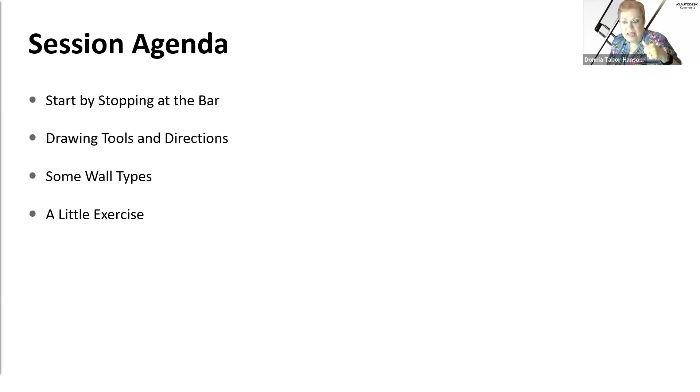We're going to cover everything across the bar. Some things you may not have touched on before, some you might have. I'm hoping that there's going to be one thing today that's just like, wow, never thought of that. But a lot of these things are things we've been using for years. So just bear with me on the tedious stuff. We're going to get some juicy little nuggets in there somewhere. We're going to look at the drawing tools and directions and how they affect the walls. We're going to look at some wall types and then a lot of little exercise stuff. So let's dive into stopping at the bar.

And we want to start with the options bar. When you start any command in Revit, you're in the ribbon area. Take a look at the bar before you go down into your drawing area, because it's very important what all is on there. There's always nuggets of information of things that you can do. So this is the options bar for drawing a wall. You can set your height and depth option, which determines if the wall will be drawn from the level up or the level down. If you've never done that, we're going to do that today. We're going to draw it down.

The benefit of drawing down: you can draw a foundation wall without having a foundation level. You don't have to have a level down there. You can just draw down.

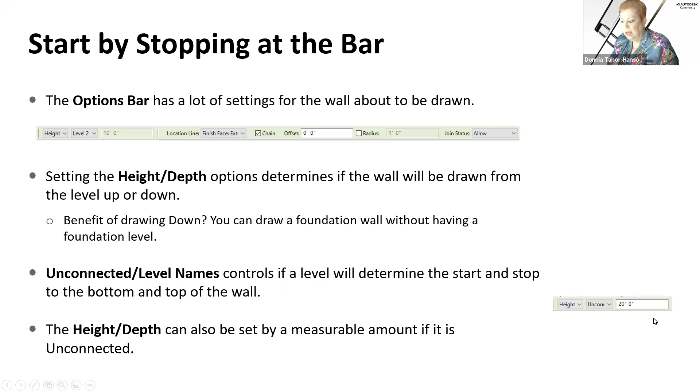And unconnected, if you go between the level name and unconnected: when it's at the level, you don't get to do anything with the height, but the height can be set measurably if you're going to be using unconnected. So if you've got interior walls that go up just above the ceiling, but not all the way up in the plenum, you can just stop the walls up there at a certain height and not have to have it connected to a level.

Now, continuing on the bar, you will have the location lines. You select what part of the wall will be following the cursor as you draw. Your options are wall center. That could be a lot of fun with some of these walls with brick to gyp, because the wall center doesn't matter to us there. Wall center would be used more with walls that have a balance of material on either side, gyp on either side. Then you can have center on the wall.

Concrete walls, center line's great. Your core center line, sometimes that's important if the columns are on the center line and you want your walls to be on the core center line. Finish face exterior, if you're bound by a building envelope and you have to stay within a certain size. Finish face interior, maybe you're working on interior walls and you have to draw along a boundary there.

Your core face exterior or interior, these are probably the most commonly used ways of drawing, because generally all our dimensions go to the core of the wall, which is the structural part of the wall.

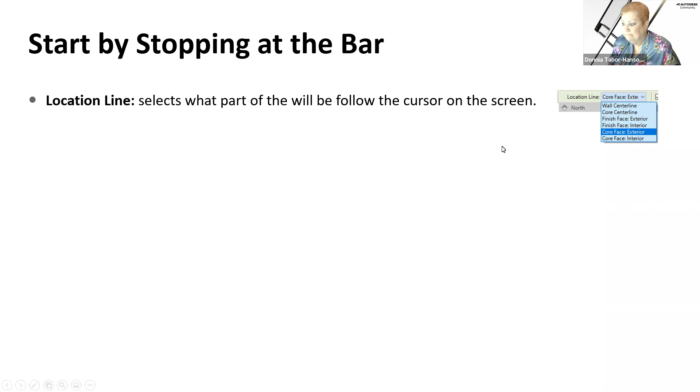There's a chain option, which just means I'm going to draw from here to here to here to here, instead of from here to here, from here to here. It just chains all the way around. You don't have it starting and stopping. I don't know why you'd take the chain off, unless you are doing just a wall segment here and a wall segment there. But yeah, chain is usually left on. It's kind of normal, although I've seen a lot of unnormal Revit.

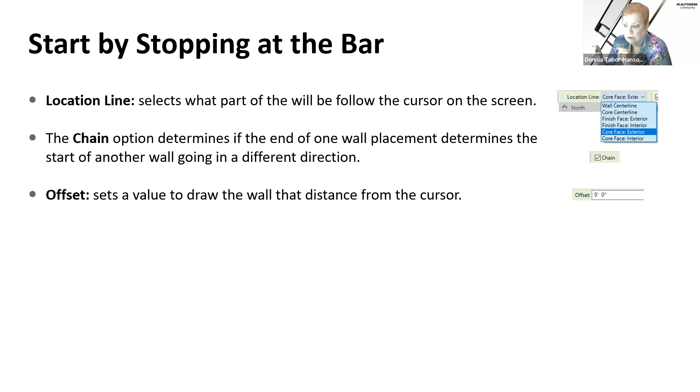The offset option will allow you to draw a certain distance from the cursor, and this is different than the pick offset. This is drawing with an offset. If you're following a boundary around a parking lot, for example, and you want to put some sort of retaining wall, you might want it offset a certain distance. And you can set the distance it's going to be away from your cursor. And again, this is based on what you've chosen for your location line. Your location line is always what you're drawing from, and we're going to look at some of those in just a minute.

Since arc walls are possible, when you select an arc, make sure you set the radius. There's no good to have an arc without a radius. So it's on the bar. The join status would either allow or disallow the joining of walls when it meets up with another one. We're going to look at that when we look at wall joins and wall corners in a little bit, but just be aware that's the end of the bar. So that's covered everything across the bar.

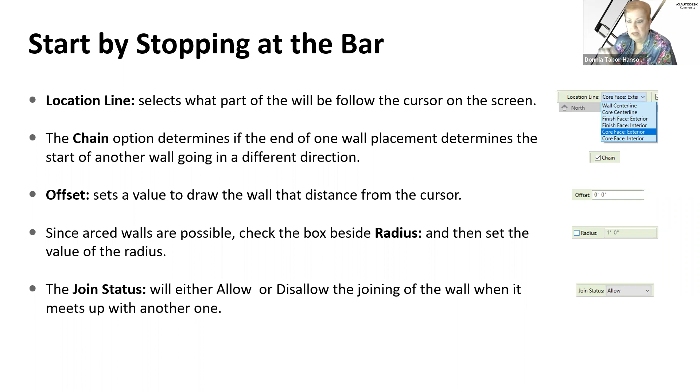Now let's go look at how these things are used in some of our exercises. The drawing tools that show up, I'm used to these drawing tools. I do a lot of families, a lot of extrusions, sweeps, etc. The one that doesn't show up in families is the option to go by an edge. Otherwise, you've got closed lines with a variety of options: inscribed and circumscribed polygons, square / rectangle, the circle, the ellipse, then you've got the open lines. And then you've got the one where you can pick edges.

This one is used more often than not for curtain walls going on some sort of surface that is a mass. Pick face of a mass or generic model to select the shape of a wall. I've seen this used in curtain walls, but it's not often used.

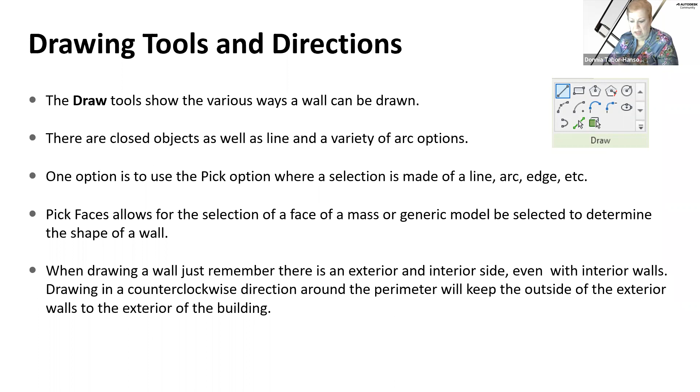And when drawing walls, just remember there is an exterior side and an interior side. And even with interior walls, there's an interior side and exterior side. Drawing in a clockwise direction around the perimeter will keep the outside of the wall outside of the building. But you can use the space bar to flip to get the exterior on the side.

So let's look at that. Let's look at a few things here. So if I want to go get a wall, and I'm going to pick, yeah, I'll just stick with this one. And I'm going to make it up to level 2. I'm going to draw, not from the wall center. I'm going to start probably with the face of core. I'm going to leave it chained, etc.

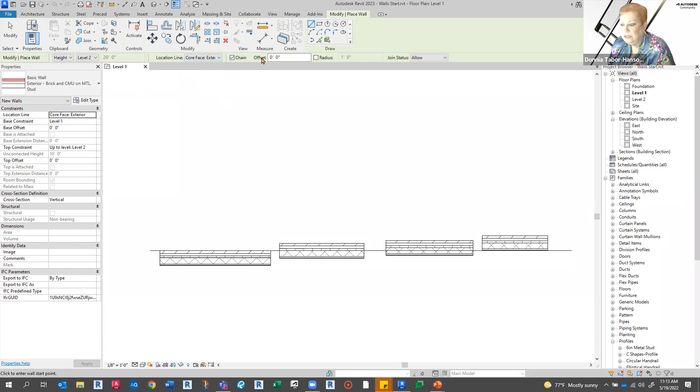And when I start drawing, my cursor is on the face of core. If I want to flip the wall the other way, I hit space bar, and now the exterior part is down. So you can draw around your building in a clockwise motion, keeping the exterior of the wall to the outside. If you keep that in mind, you don't have to remember to flip back and forth sometimes.

It's kind of weird. I've got this real thing about reference planes. And if you followed me along, especially about families early on, I must have talked about reference planes in 3 different sessions. Reference planes have a front and a back. And with reference planes, to keep the front towards the centroid of your object, you draw counterclockwise. With walls, you draw clockwise.

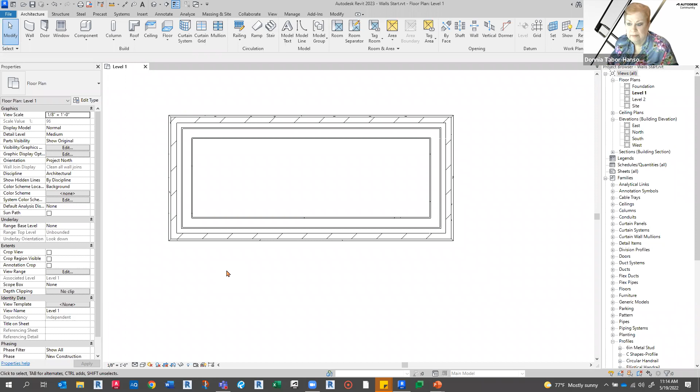It's a practice thing. Once you get it in your mindset, it's a practice thing that you'll start learning. So it's just a practice that I have done. And I know when I draw my reference planes, I immediately think where I want the inside of it to be. Same thing with walls. I want to know where the inside is going to be.

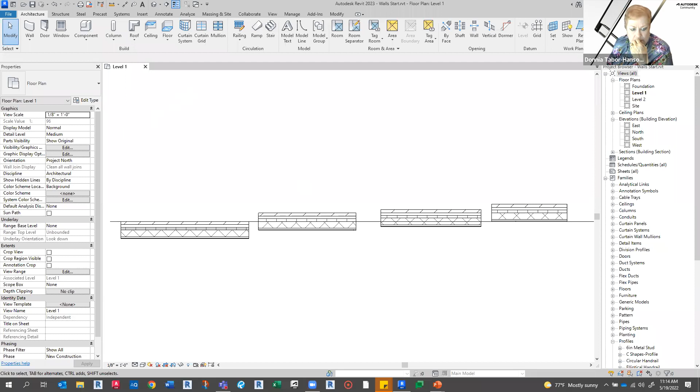Okay. And talking about the walls with their location line, this wall was drawn with the face of the exterior. This one was drawn with face of core. I drew this line here. There's just a little line in here, and I drew it and put all of these across through here according to their location line. This one was drawn with, let me quit selecting the line, that was drawn with center line of core.

This was drawn with interior face of wall. So it matters where you're going. And these were all drawn along this line like this. Now, you can change your location line. If I would prefer this to be on the face of core, then I can come over here to its instance properties and change it to core face exterior. It doesn't move the wall. All it did was move your location line of the wall.

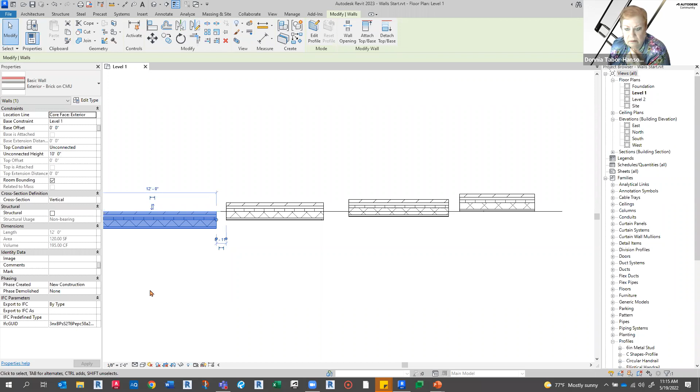Now, let me undo and put that back to show you something else about it. Did I put it back? Yeah. Also, when you want to flip them, it's going to flip around the location line, which can be very important to know if you want to keep your location line on that face of core. See? So this one would flip it right around the face of core, putting my brick to the outside and my gyp to the inside, or vice versa, and yet keep the same core line running across.

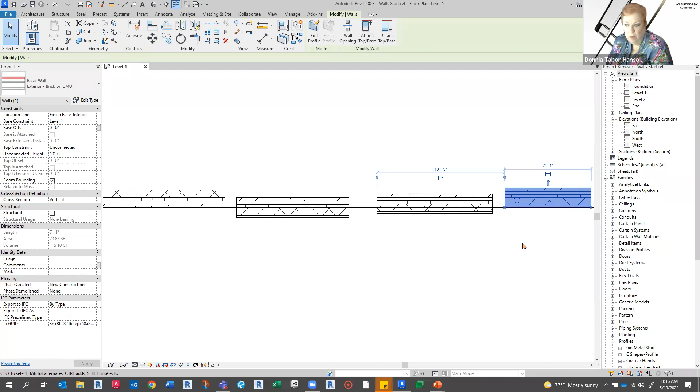This is center line, so of course, centered on the core, it's going to just flip the exterior out and in. But just because you drew something with interior face doesn't mean you can't go over here and change it to have your core face exterior.

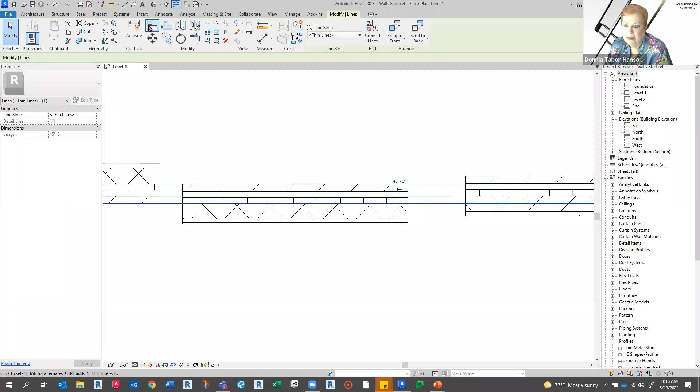Also, when you're aligning things, if I want to align this to the center of the core, I can tab to get that. But by default, it's going to want to go to certain things. So if I hit align and go here, it wants to go to there. It wants to go to exterior face of core. It wants to go outside. So that's the 3 that it wants to go to all the time.

If you want to align a wall, it's going to be your exterior face of wall, your exterior core, and your interior face of wall. Those are the 3 that it defaults to, but you can tab into the center line of core. I can get to the core face. So you can tab to get to the others, but the ones it's going to go to most often is your face of wall on either side and your face of exterior core. Those are the defaults, which is as it should be, I think. Those are the ones we're concerned about the most.

Okay. Oh yeah, I want to show you something else. When you're working with a wall, no, I do components too often, and you're using the draw tools, you can pick any of these, but when you want to use the pick line, when you pick a line, you better make sure you know where you're going here. I can pick the line and it goes there. I can pick the line here and it goes that way.

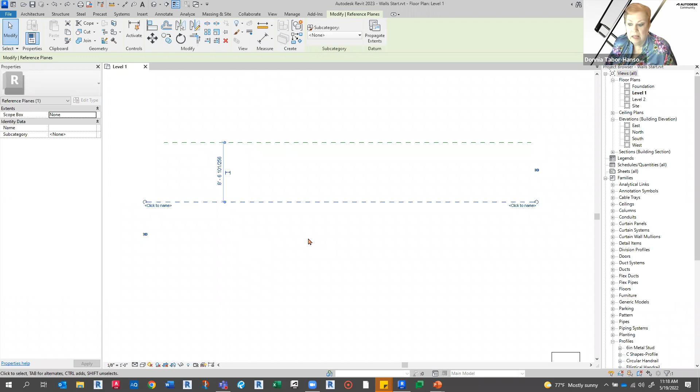It has nothing to do with which way the reference planes were drawn, because the reference planes are both drawn in different directions. You can tell which way a reference plane was drawn because the exterior of the reference plane has the name on it, or the click to name. So these are two different directions. What matters on the pick line when you're doing a wall is which side of the line that you're picking, line or edge of wall or edge of concrete or whatever you're picking.

I'm going to finish face of exterior. No, I'm going to go to core exterior. And if I pick with my arrow tip above the line, oh, I hit pick face. That ain't going to work. Core face exterior. If I pick above it, that puts the exterior outside. If I pick below it, it puts the exterior to the lower side.

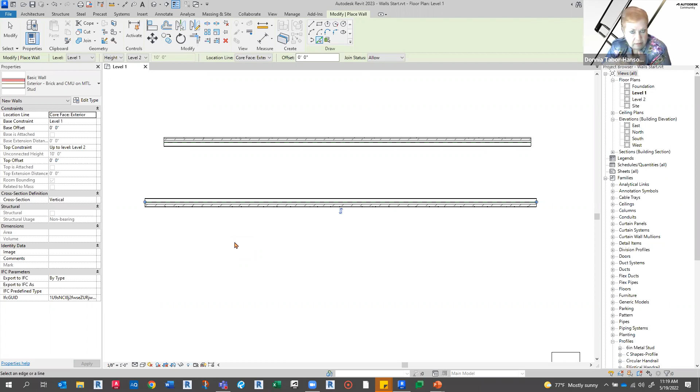So that's the difference in using pick line as to which way it's going to go, is whether your arrow tip is above or below the line, or left or right of the line, whichever. You want to make sure you have your arrow tip to the side that you want to have your external material. Okay. Are there any questions up to this point?

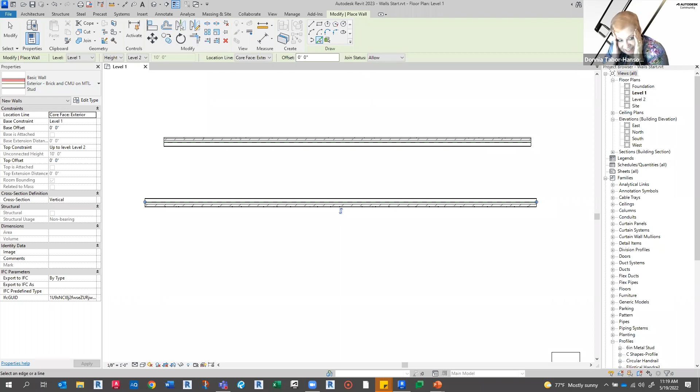No, we've hit a wall. You've been waiting all day for that, haven't you? You waited ever since I brought this one up. Yeah. Okay. Location, we did get a northeastern comment from Matt Murphy. So yes. Location line, wicked cool. I can't say it like Matt, nobody says it like Matt.

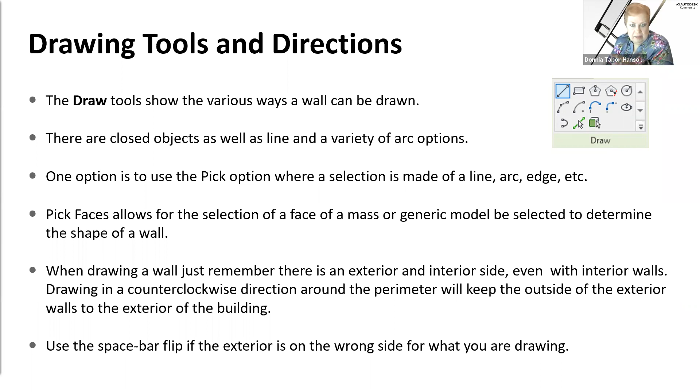Okay. So yeah, just learning about the location line and stuff, and those little intricacies of your aligning tools and tabbing through and things like that. We get to drawing and we do the same thing. And if we don't like it, we generally rip it out and just redo it. Instead, you can learn ways to fix it instead of having to redo things sometimes by looking at those little aspects of the wall tools.

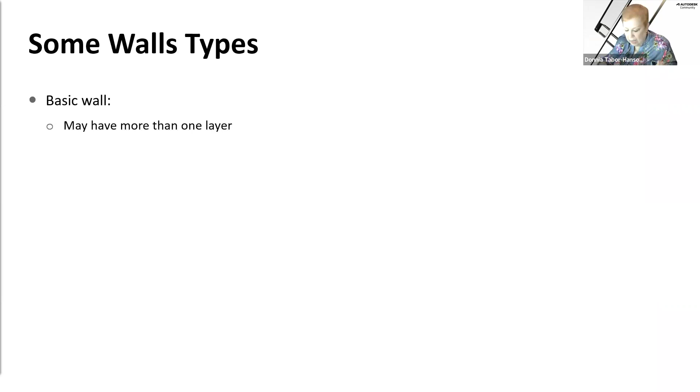Okay, we got several different wall types. We get your basic wall, which may have one or more layers, and it goes from one level to the other, which is what I was working with, what I considered a basic wall. They can have sweeps and caps and reveals, and different layers in them, different materials and stuff. They can be structural or architectural.

And the difference in the structural and architectural has to do with whether you feel like the core of your wall is the structural wall or not. And that's something you'd have to determine as you're going along. A stacked wall is made from aligning one basic wall on top of another. And we're going to look at all of these things here, and we're going to look at sweeps, reveals, and all this stuff.

And they most typically will share some of the same layers so that you have a continuity of the material going from one layer or from one stack to the other stack, from one wall to the other type. They can also be structural, architectural, and the other type of walls they have is curtain walls. And they're made out of mullions and panels, and that's a whole different lesson in itself.

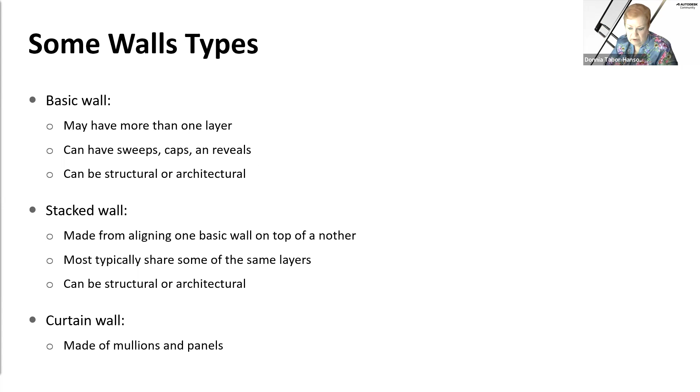So I'm not getting into curtain walls today. Like I said, there's not an hour long enough to do curtain walls in with what else we have.

All right, a little exercise. Let's stand up, stretch your arms.

No, let's talk about exercising with walls. And it starts with knowing your layers. So I'm going to just grab this wall, he's handy, and start looking at the layers. You get into those when you edit type in your layers.

When I first started teaching Revit, an architect said, oh, good, layers, finally. He came from AutoCAD. No, these are layers that are different. This is when you go and you say edit type, and these are your layers of your walls. Your exterior side is to the top. Your interior side is to the bottom.

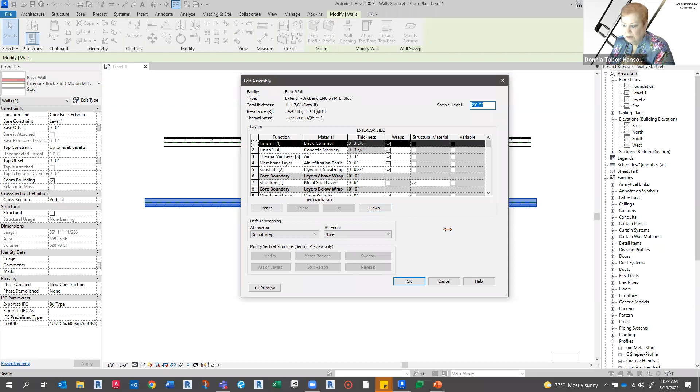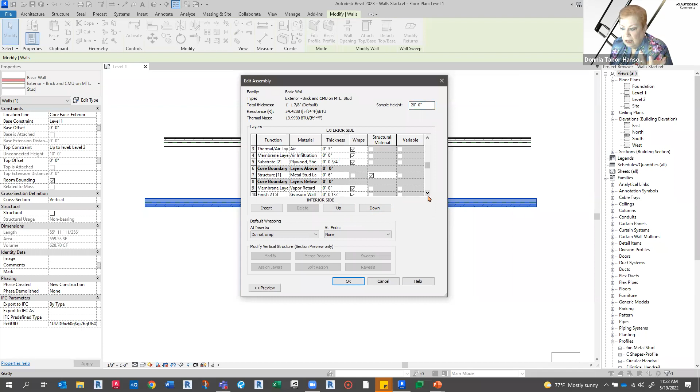I don't know why this one gets so big on me sometimes, but you can go through your layers and see what all you've got. And this is a pretty robust set of layers here with brick. It's got concrete down here on the bottom, with air infiltration, plywood, metal stud. The metal stud is the structural part. It is held between your core boundaries.

Your core boundaries, you cannot change the thickness of. They are just held there to make sure that there is a delineation for your core and your finishes. Your finish 1 or 4 is considered external finishes. Your finish 2 or 5 is considered internal finishes. So your structure is first, your substrate, and then you go with your thermal layers and then your finishes. That's your 1, 2, 3, 4, and 5.

Some of them don't have anything, like your membrane layer. Well, it's also got a thickness of 0. And I can look at this layer because this has 2 finishes here and they're tied together. This has got a split in it. You can't see it here because you have to go into an elevation or a section. So there is a split in the material.

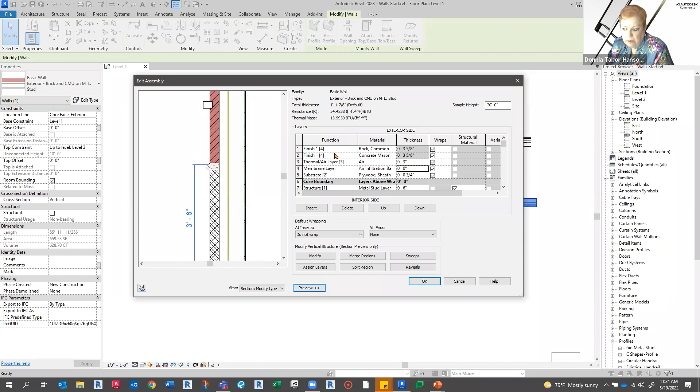And when you do a split, they have to have the same thickness. We'll do a split here in a little bit, but that's why that one has 2 finish 4s up there, or finish 1 function 4 up there, so that you can have the 2 different materials on those. If you want to have a different thickness, the way to do that would be to get a stacked wall. We're going to get into all this stuff as we go along. So right now we're just looking at the layers, and these are your layers.

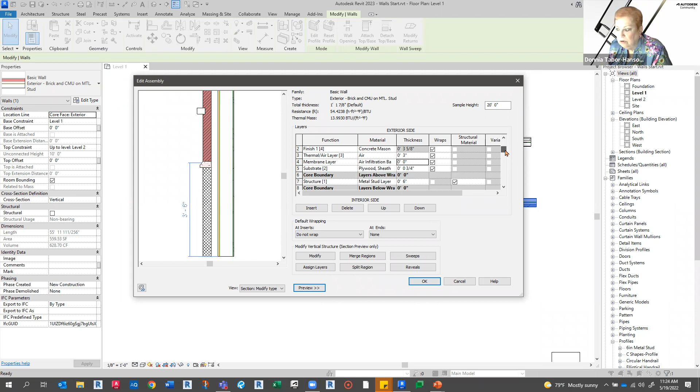You can determine if they wrap or not. I'm going to go back to a floor plan view, and when they wrap at inserts, I'm going to go ahead and wrap both. And at the ends, I'm going to wrap exterior. Well, see, I don't have an insert in the preview. I can't show you an insert, but I can show you the at ends where it wraps the exterior, and you can see what happens when you wrap the exterior.

You can also decide whether it wraps or not. Maybe you don't want the plywood to wrap. So you take that off. The plywood wouldn't wrap. Your air still wraps. You need to have something to hang the brick on. Maybe you want the plywood to wrap, but you can determine how things work when they're going through there, and how they turn in and how they wrap.

This piece out here, that is your reveal, and a reveal will not wrap. So that's what that little piece sticking out at the top is. And you can see that in section right there. So that would be the part you saw sticking out that didn't wrap around. So that's about it with layers for now. Okay.

Placing the wall by knowing your layer. Use the flipper if necessary. Remember that the flipper shows up on the outside of the line or outside of the wall, and that's one way to tell if you're in coarse view and you only see the lines.

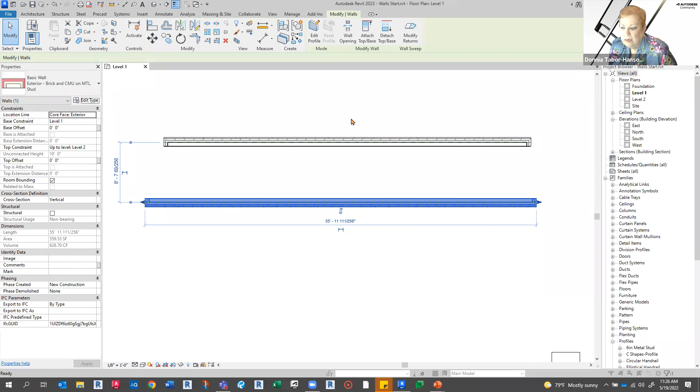Let's look at that while I'm thinking of it. When I am in edit type, here is your coarse. Do you want a fill pattern when you're in coarse? Maybe I'll say I just want a solid fill. It's going to be black, so that if I am in coarse view... yeah, it's a bit much. That's why it's usually set to nothing. That's one thing it has going for it. That's why if you look at somebody's drawings, you see all these heavy black lines. That's what has happened.

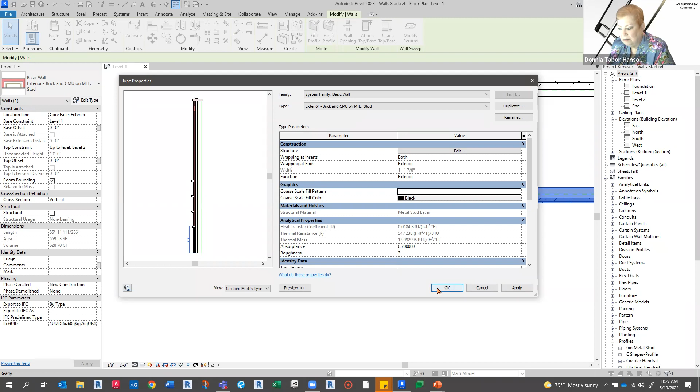I get it all the time from architects. We don't do a lot of walls and stuff, we do kitchens, but I had a previous life doing this. When we do need something set up where we only have a CAD version, I go in and do the walls and such most of the time for people here. So I still stayed in touch with these things. But sometimes when we get a reference file from somebody, they have turned all their walls black in coarse, and it's like, good night, it's a bit much for us, we think. But at least I know how to get rid of it.

All right. Please, when you draw walls, go all the way. If your wall goes from level 1 to the roof, tell it to go to the roof. Go ahead and attach it to the roof. That way the roof level moves up and down, it moves automatically with it. It's attached.

And you think, well, that's easy to do. What about your shaft walls? I got into a building one time and was asked to figure out why the file was so large. They were drawing the shaft walls on every level. Well, why don't you just go ahead and send your stairway walls all the way up? Send your elevator walls all the way up. That way they're already there.

When I worked on the last big project I worked on for an architectural firm, it was a dormitory. Me and one other guy was doing the Revit model. I had core shaft walls and such, I had exterior and had all the internal glass. It was a dormitory, and down on the lower level they had a lot of storefront, so I was doing all the storefront. I also had all the stairs, and we had a glass stair. I used a rail made out of ship wiring, just a wire rail type thing. It's really neat, I've gone in to see it once, it is amazing. But when I was working on that, the guy working on the interiors could interact with mine, he could use it and connect to the walls.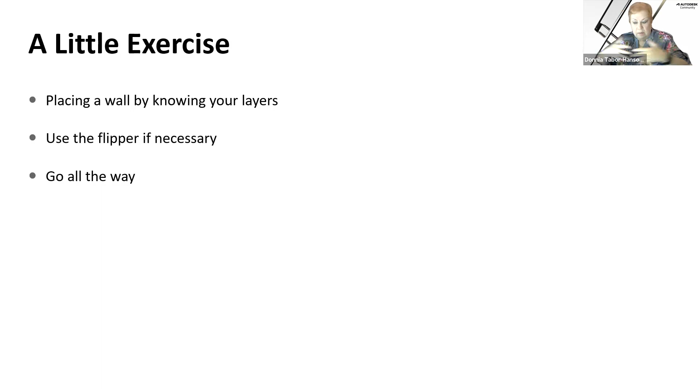But we just had an agreement. I did these walls and he did those walls, and we had them on different work sets so we could keep up with them. It's just easier if you're going to send that wall up, send it, go all the way. There's no reason not to.

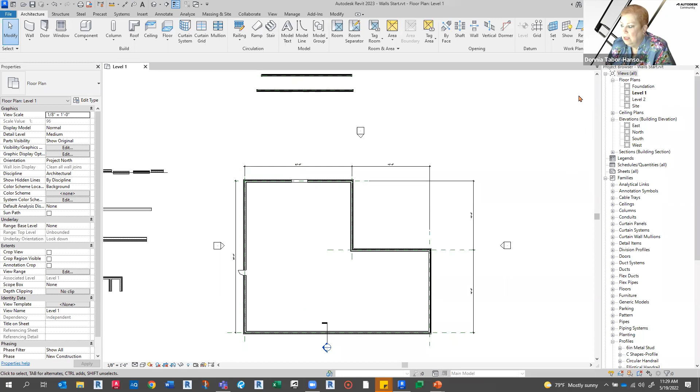All right, creating a compound wall. I'm going to do a little exercise. So here I've got a building I've just thrown up here to play with. I've got a foundation here, and I see where I had put the reference planes. I'm a big believer in reference planes, really big believer in reference planes, and aligning things to reference planes. I know that these go right along the core of my wall. I can see a wall opening there.

Yeah, so I'm going to do a foundation type of wall. I'm going to go to wall and architectural, pick me a foundation, 12-inch concrete. And I'm going to draw, I've already set it to depth, unconnected. So I already played around with this one.

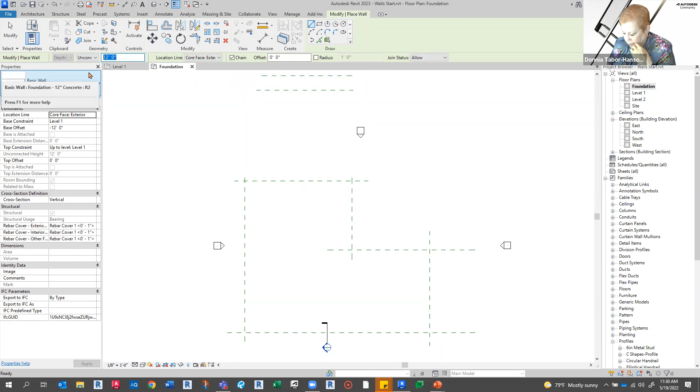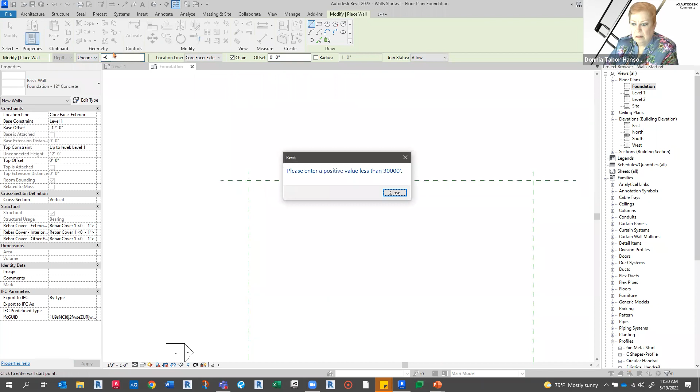You want to make sure if you're going to do this, let's say -6 feet. Please enter a value, -6. Oh, come back here. Okay, let's start over. It says no, we can't start over. Why?

Okay, it's going down. So if we go here, here, work ourselves around, I'm going to go into this section down here and look at this.

It went down 12 feet. I was trying to do negative. It went down the 12 feet that was sitting in there, so that allowed me to go through and put this in there.

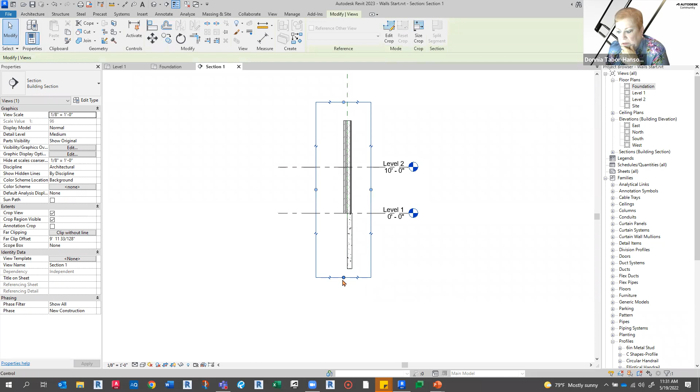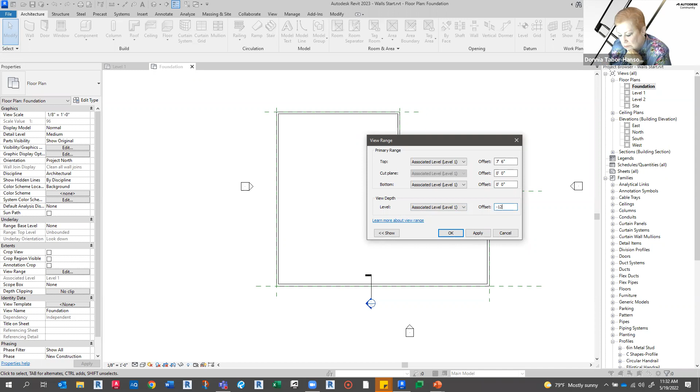Notice there's no level down here. I have no level. To get this view, I went in and duplicated my level 1 and edited my view range. I set the cut plane to be at 0 and the level to go down to -6. Maybe I want to go down to -12. Let's do -13, just cause.

So therefore, I'm looking at a level 1 plan view that has a cut plane at 0, and I'm looking down below the level, so I'm not seeing the above stuff. That way I can keep from having another level, just because I'm trying to do something different here, show you something unusual, ways to do things differently.

But now let's take this and let's get us a compound wall. I mean, a stacked wall. I want a stacked wall.

I thought I had it in here. Oh, I had a blow up. That's what it was. I had a blow up and lost my project like last night, and I can't find the one I did. Let me come back to that.

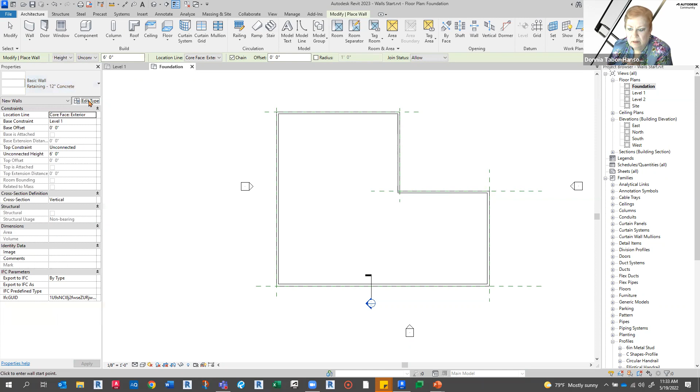I'll look at retaining wall, edit type. No, I'm going to come back to that. I lost my example and it's thrown a loop at me. So let's keep going on.

Okay, we drew downward. So now let's talk about pulling the layers down. When we have the exterior layers that want to pull down over this, let's go and get in this section and let's grab this wall.

We want to pull the layers down across this. This is something you've probably done in the past. It's just a simple rule of what gets unlocked.

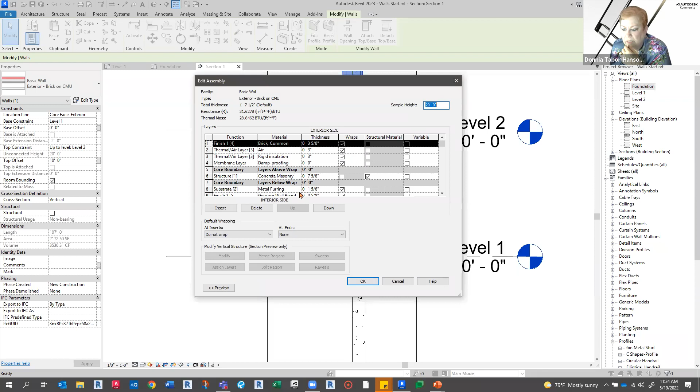So if I come in here to the structure of this, and this keeps getting wider. When I go preview, that's where it gets wider because I keep having preview on. And I'm in the section mode.

I can come to the modify here and go in, and when I hit modify, I can slide in here and pick on this and I can unlock this.

I had to make sure that it was not on a layer. What was happening there a minute ago, I should tell you, is it was picked on this and that was highlighted, so I couldn't modify. So I had to make sure it was not setting on a layer. I just want to try to finish that. So when I hit modify, I'm not on a layer and I can modify and pick this and unlock it.

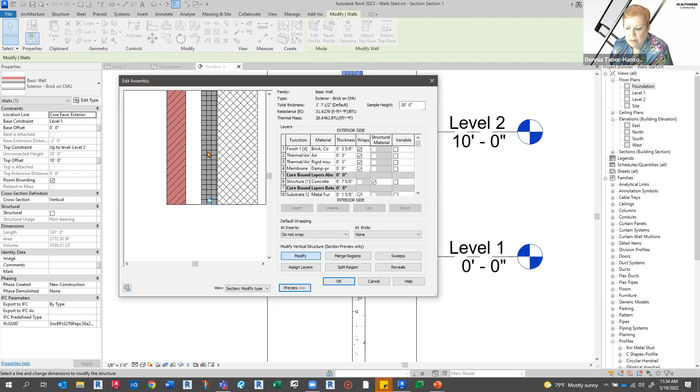Now I can pull these three things down. So now when I'm in a section view, this one had already been pulled at one point. So now I can pull this down. I can also determine how far down it goes.

-2 feet, so it has a stop. So therefore that's how you can get your exterior wall to cover over your foundation wall when you're doing that, and that's how you can pull the different layers for yourself.

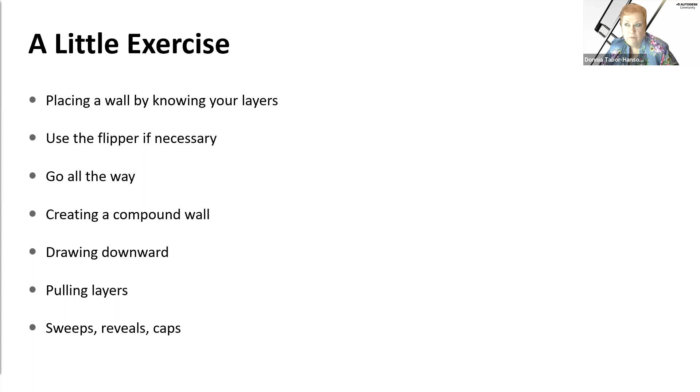Sweeps, reveals, and caps. These are pretty easily done. You do have to have a profile for these, and a profile has to be drawn with a completed loop, with the loop going all the way around. It is something that they have some great examples in here, but I'm going to show you a little extra something on them where I've put some details in.

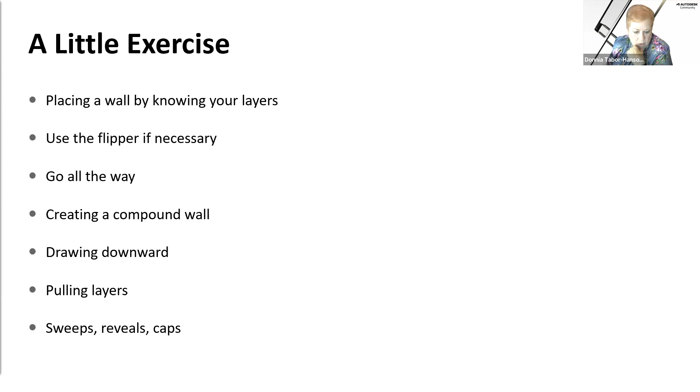So I'm going to go and get this wall and change him out to brick on metal stud. No, you're not it.

Yeah, here's one with all kinds of reveals on him. He has a sweep, he has the split, he has reveals, he has a cap. Let's go look at him.

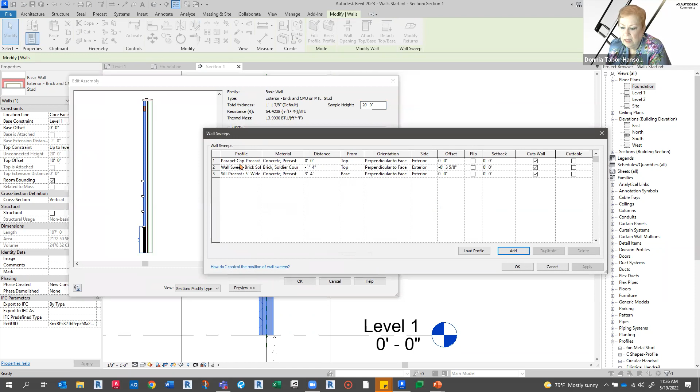Under edit type, we'll go to structure and we'll go to a preview and start down here looking at these sweeps. He has 3 sweeps, he has a parapet cap. You notice when I pick on it, he highlights over here.

There's a wall sweep of brick. That's a brick soldier course. It's hiding around up here at the top. Let me zoom in on this just to show you. So there's that.

He has a sill, which is right here. These other 3 are reveals. We'll look at those in just a minute.

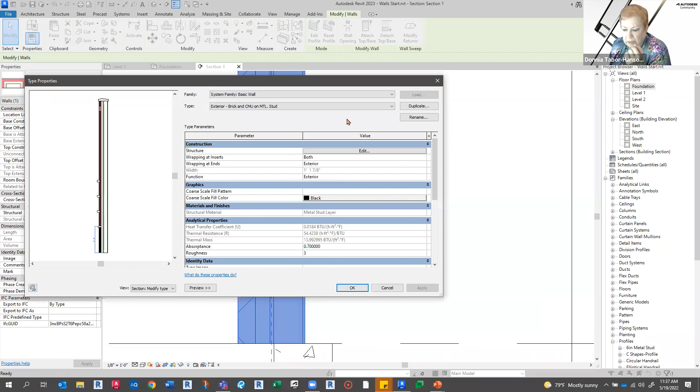So we have these three going along with here, but this is a simple metal stud. Let me go get one that has - I'll show you - if you have some details such as the sole plate or the top plates that you want to add to your walls, you can do that with sweeps.

I just need to add one, and the profile has to be loaded. I've got a 6-inch metal stud profile that I'm going to add at 0 from the base. I'm going to put it on the bottom, perpendicular face, offset - we'll look at that in a minute, I'm going to show you how it's done. I'm not going to have it cut the wall because the wall is going to go through. This is just a detail.

It doesn't matter if it's cuttable or not, because I'm not going to use that. The cuttable setting has to do with whether, when you put something in there, it cuts it or not. Typically I would have these cuttable, so they could be cut with anything that goes in there - doors, windows, etc.

Donnia? Yes. I've been waiting for a question. Kimberly threw one out, wall related here - what is your method for troubleshooting wall joins? We're going to come up on that. Awesome, I got some wall joins set up to play around with.

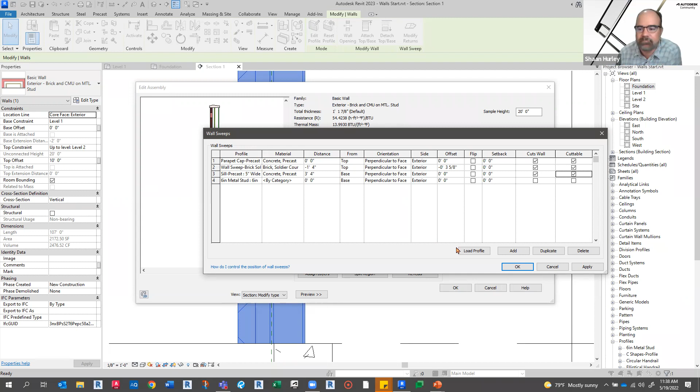So I will cover Kimberly's question. When I tell it okay, it goes to the outside and it doesn't look like what I told it to be. So just to give you an idea, let me pull that up here and edit it. You have to have a continuous profile.

So I think I'm really smart - I'm going to go in there and make my continuous profile, four lines, and I made them invisible lines. Well, they're still going to cut. You're still going to have a line, so it doesn't matter - it could be regular lines or profile lines, it doesn't matter.

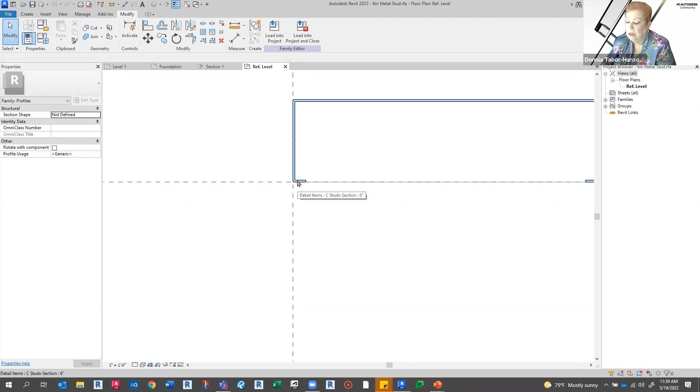Then I just placed in here a detail item for C studs, section 6, found inside - it's an out-of-the-box detail, and that's what I created my profile with. I just know it's 6 inches. I didn't go through and put reference planes on it and all this other stuff, I just went as simple and as fast as possible.

So I go in here with that and put it in. Look, when I'm outside the wall, I can see the detail, but when I am editing the wall, I don't see the detail. So when you're building it, it's like - did it happen, did it not? Because I've got this gray blob here. Well, it's gray because you have no material on it.

So when I come back over here to the sweeps, it's material by category - what's the material by category by default in Revit? It's gray, the gray blob. Now I want to push it back in, and I know I've got a half inch of gyp board here, and I know this wall has a total thickness of one and seven-eighths, so I've got to push it in all but half an inch of that.

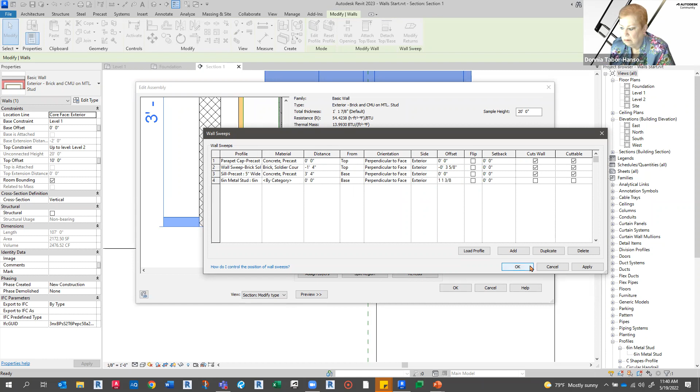So I want it to go offset. Now here's where I get mixed up - is it here or is it here? Here, I'm going to go with here. And I want to go 1 foot 1 3/8. And I did it wrong - I went down, I do this every time. It has to be negative for it to go that way. There, now I've got it inside my wall.

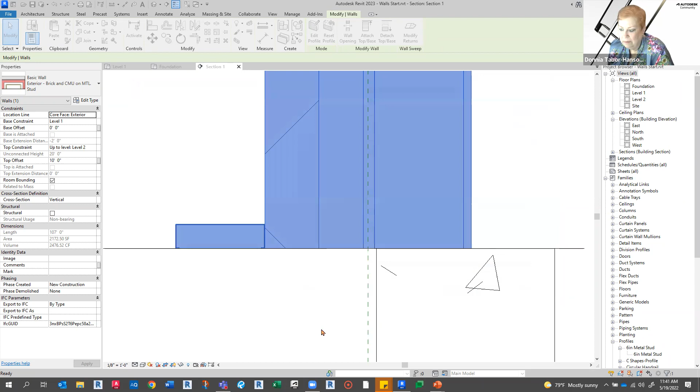Now I've got it where it will show up with this wall every time, so if I do a wall section, it's already there. How about the top plate? We've got two at the top we want. Same thing - we're going to edit the wall.

And we're going to get - oh, can I go here? I keep going down too fast. I'm going to get the sweep, and we're going to add and add - I'm going to put two of them up there. I'm going to copy this, but instead of that, I'm going to put it from the top. And to keep them on top of one another, I'm going to flip one of them - flip is going to flip it down.

And from the top, the distance is 1 5/8. No, come on Donnia, you're working in inches too much. Control C, Control V. Okay, okay. Did I tell it? Where did I tell it to go? Come back.

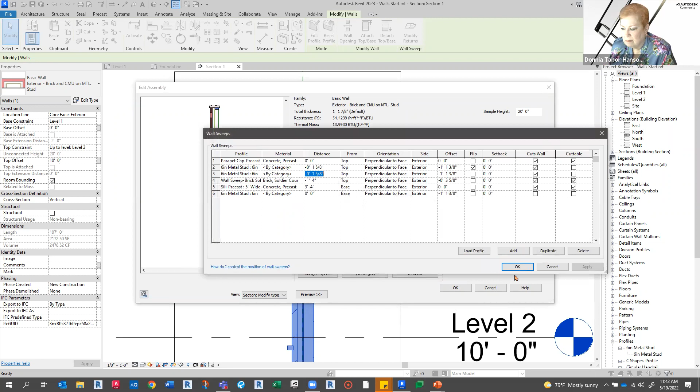Minus. Okay. Did both of them get a minus on it? Yeah. But this one of them needs to be... Nope, I got 2 of them up there. By flipping it, I get it down there. Otherwise, I could move one down. So now let's go see what it actually looks like. And you have your 2 studs built in up there. Okay. And you can go look at that same wall and figure out some more things.

Let's look at a split. Let's look at my time. Oh, we're doing okay. We're doing okay.

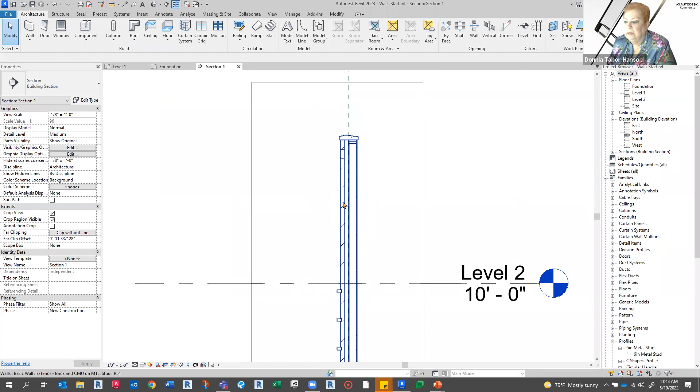Right over here. This one's already got a split. Let's change it to something that doesn't have a split. Brick on CMU. Yeah, no split. So we're going to go in here and edit this wall and come down here to modify. Slide it over here. And if you want to split a region, slide them up here, split.

And my thing, do not hit escape. You're like, I'm done, escape. It will take you out of here. I've practiced this several times this week and I keep hitting escape. It'll take you right out. It's not what you want.

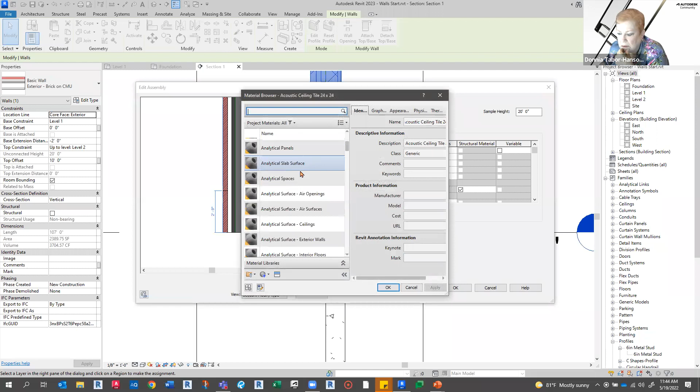So now I need to assign layers. I need to add a layer. Insert. Notice the thickness is 0. I'm going to come in here with a precast concrete, something. And then I want to assign layer. There. So by picking on this, coming down here to assign layer, then I can go in here and I can assign that layer to that.

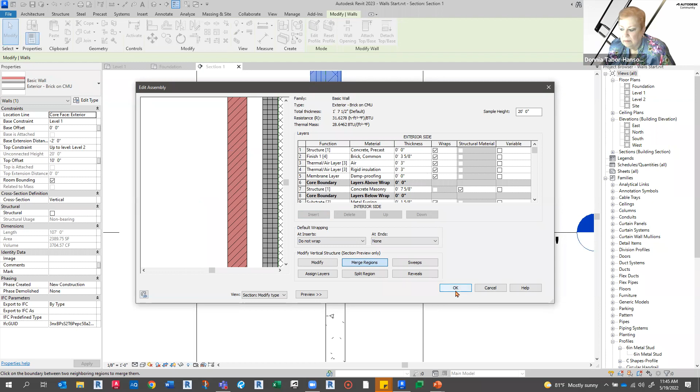If you decide you don't want it, you can merge your layers. When you merge the layer, I want to pick on the side down below, so it came down below, the arrow thing pointed down, and I can put the brick back. But that's how you can do a split.

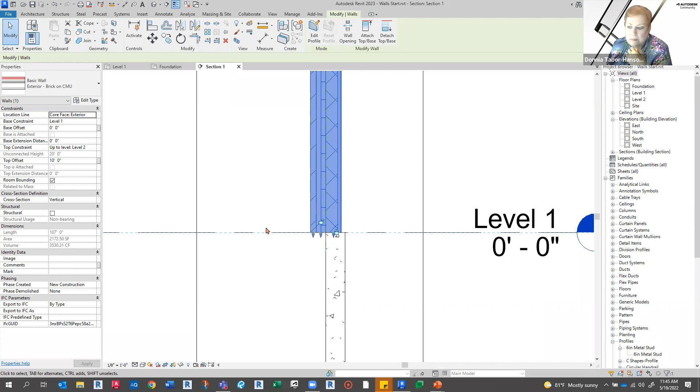But let's get back to tapered walls. Can't remember when they came out. They've been out for a little while. When you do these, you have to make sure you have a layer that is, yeah, whatever. You have to make sure you have a layer that has a variable. If you don't have a layer that's a variable, you can't make a tapered wall.

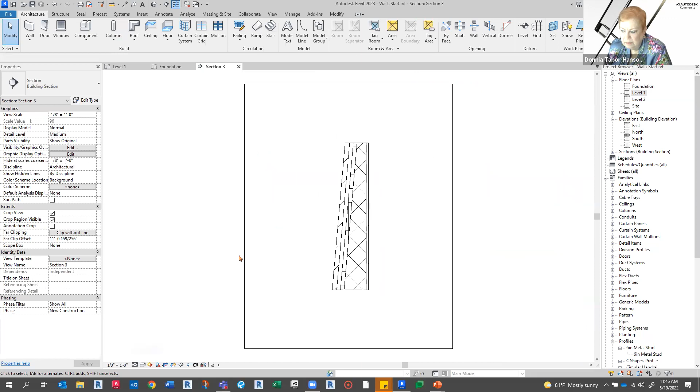So I have a tapered wall over here, set to go. And I'm going to come in here and look at this. Well, that's a slant wall. We'll get back to that one in a minute. A tapered wall. Let me go ahead and put this on a medium. See, I've got a layered wall, and this layered wall has got a taper to it. So the only thing you need to learn is how to get in there and do this.

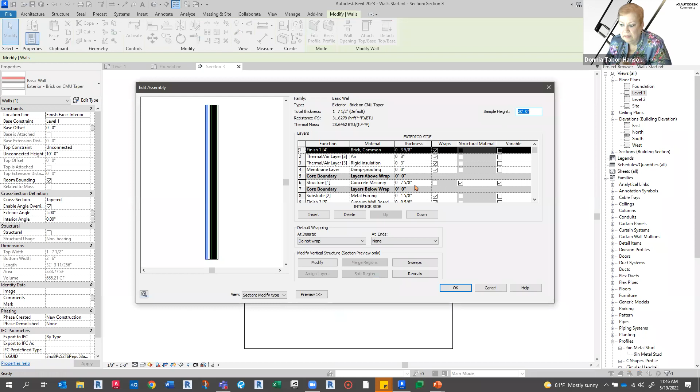And to do that, you have edit type. You see this extra checkbox? We haven't covered that one. That's when you make a material that has a variable value to it. And this is 7 5/8. And you notice the 7 5/8 started at the top.

So when I put this wall in, once you have a tapered wall, if you want it tapered, come down here, there is a cross section here that says tapered. And you can set your exterior angle or your interior angle. This one has an exterior angle 5 and an interior angle 0. If I gave this one also a, let's go with 5 also. See how it angles out on both of them. But this is where you control how your taper goes.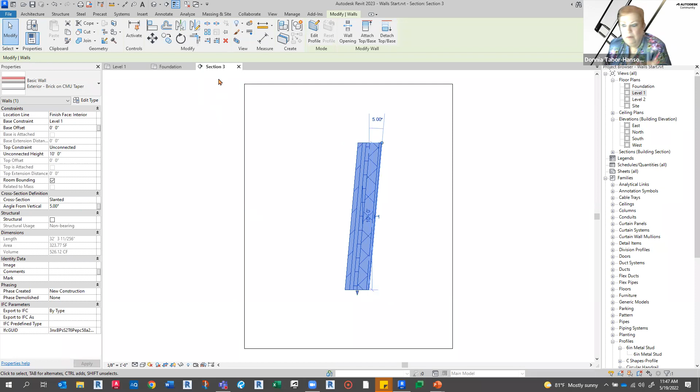Now, from here, I can also go back and tell that you're a slanted wall. I'm slanted at what angle? And the whole wall will go slanted, which is what I had in the other section also. So I have a slanted wall up here, pre-set up. And this one was just a basic wall. No layers to it or anything. And it was just slanted. You can tell what angle you want it to be on and stuff.

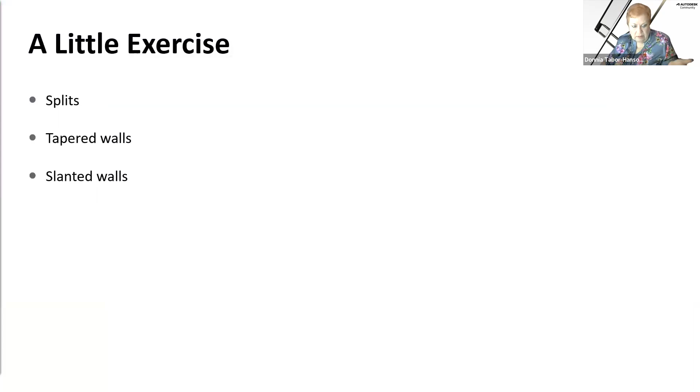And if you want to go back to a vertical wall, you can. If you go back to slanted, you can go back and put some slant on it. The only way I can go back to tapered is if I had something that was variable with it. So that is your tapered and slanted walls. Now let's talk about editing a wall profile. Just don't. No.

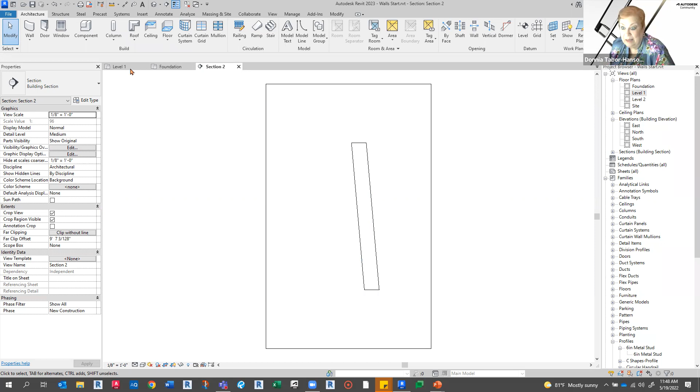People edit wall profiles. Why? Because they need to put an opening in it. Well, put an opening in it. It's one thing that drives a lot of people nuts, and I'm one of them. When you want to go in and you pick on a wall and you go grab this right here, it says edit wall profile.

Think very hard while you're doing this. Do you need a wall opening? Go grab wall opening. It's right there next to it. So here I have put in a wall opening. I didn't have to go and edit the profile to cut a hole in it. Don't edit profile if you can keep from it at all. Don't. Just no. That hurts me.

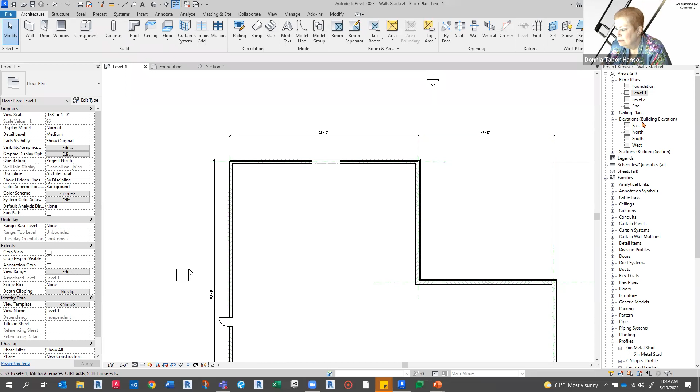That's enough on profiles now. Floors to walls. I'm gonna go into the second floor and put in a floor just up here. Let's go ahead and make this medium. When you choose a floor, the way it interacts with the wall depends on the type of floor that you choose. So if I choose an architectural floor, room bounding, fine. Go by boundaries. Let's just go ahead and say select walls and hover, tab, pick, and say, yep, we're good.

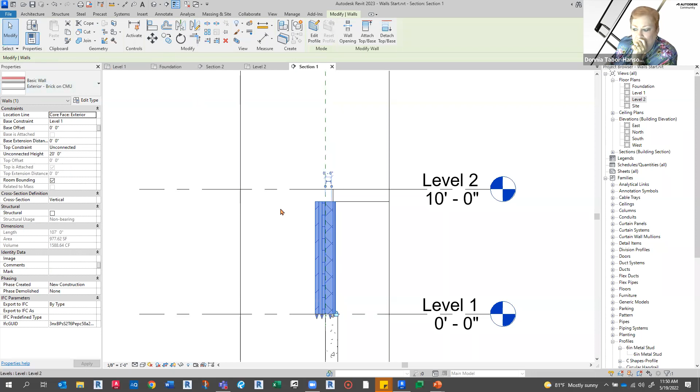Sure. Now let's go look at our section. This wall, let's come here. This went up to level 2. What if we go unconnected and go 20 feet? He says no. Not gonna let me. Undo, undo. So it took that wall down to that level and that floor went in there.

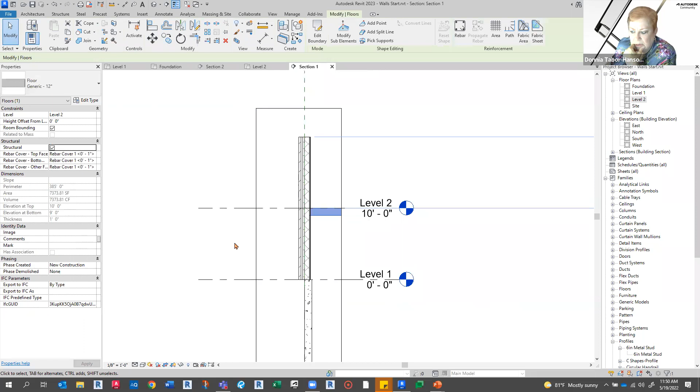If this floor is structural, when it's put in, it will want to cut into the wall. So let's go back to level 2 and do a floor and make it structural, and it should interact with the wall and cut into the wall. Architectural, floor, structural, hover, tab, pick. That's what I did. I had said to go ahead and attach. I'm gonna say don't attach.

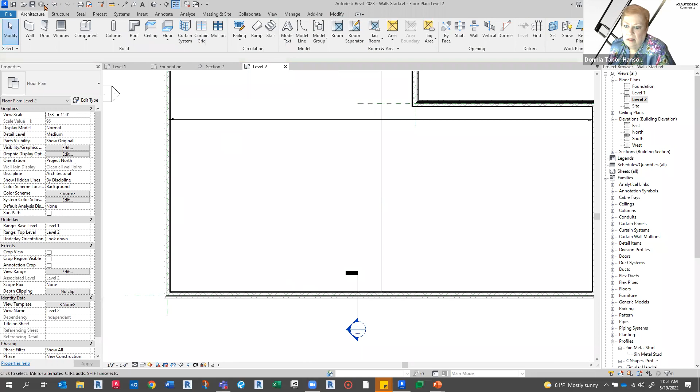And now when we go back in here, this one's not going into the wall. What did I mess up? Undo, undo, undo, undo. This is redo. No. It's not going to go into the walls today. This is not my day for floors. This is my day for walls.

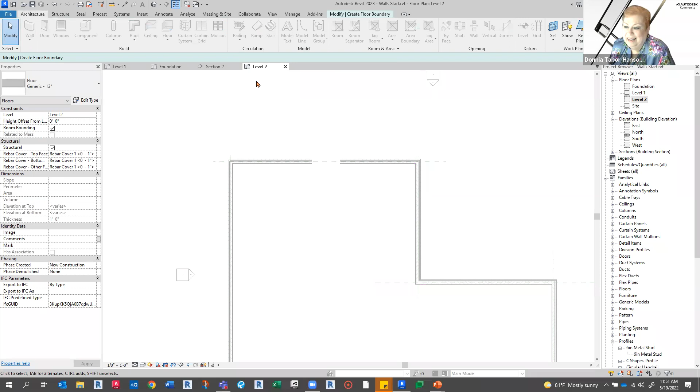We're going to have a whole section on floors soon. The floors are just jealous. That's what it is. Tired of the walls getting all the attention. Yeah. And I swear, some days you can practice this stuff and it doesn't help.

So when I go to, and see, that time it went into the walls. Don't attach. Okay. I don't see that I did anything much different, but yeah, it went into the walls. The structural will want to go into the walls. The architectural floors that are not structural, we want to be like, in my house, I've got log walls that went all the way up. So we have joist hangers on the log walls to put the upstairs floors in.

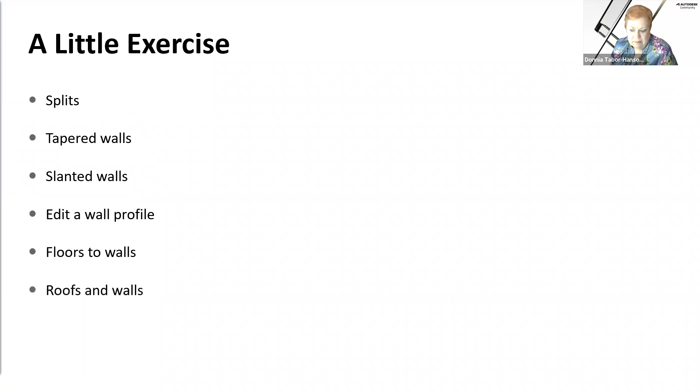Floors got me. Okay. Roofs and walls, you just attach them. I'm looking at my time. I don't have a roof in here, so I'm going to go to the wall joins because I want to make sure that I get that question answered. And I have things set up over here for joining walls. These walls are drawn just around through here.

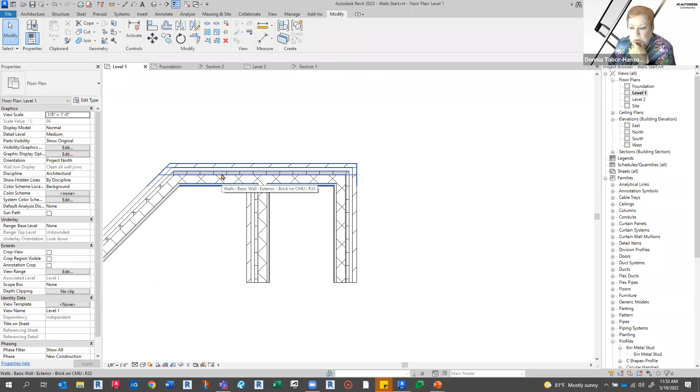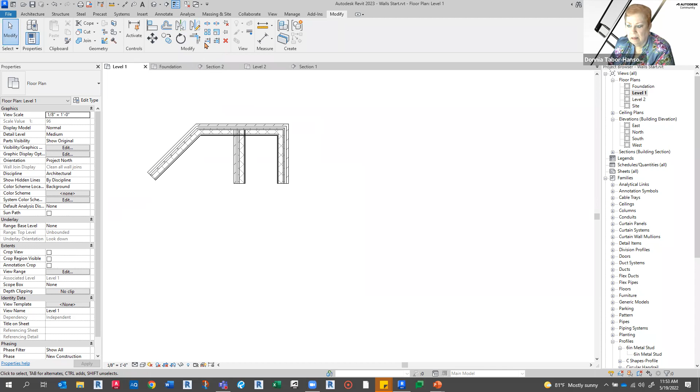And you can go to your modify tools, and when you want to look at your wall joins, you can come in here and pick on these, and then you can decide whether you want to allow join or don't allow join. If you don't allow join, see, it's going to go straight in there. And if you allow join, let's put it back.

When you go and get wall joins and you want to pick on them, then you can also have these options here. That's a butt, and you can hit next and decide which way it's going to go. So it's a very subtle thing here on this one. Miter is also an option, and I have worked on some walls that had funky things going on, and miter was the best way to get them to join. But it's just looking at your options here, and you can go to the previous version. If you go to butt, you go next and previous, or you can square them off, which is not gonna make a whole lot of difference here.

But let's look what squared off does to this one right here. So here I can do the butt, and I can go to the next and decide which material is going to pass which one, or I can do the miter. But when I go to square off, that squares it off, all right. Squared off on the next. So I've got two versions here of square off. You want to do that one or that one?

So it's a matter of, first you got to make sure you allow joins, and don't forget to try these variables up here when you're working on your wall joins. Make sure you try these out. Does that answer the question, Kimberly?

Most time people just hit this and they hit this and they're like, well, it didn't work. Don't forget, what did I start at the beginning of the thing? Stop at the bar. You got it. You can do a clean join or don't clean join. Well, yes, I'll do that. That'd be ridiculous. But no. Kimberly says you got it. Stop at the bar. Yeah, stop at the bar and see what you've got going on here, because you've got options. And just what it does when you first pick on it does not mean that that's what it's going to stay. So you do want to stop at the bar when you do that.

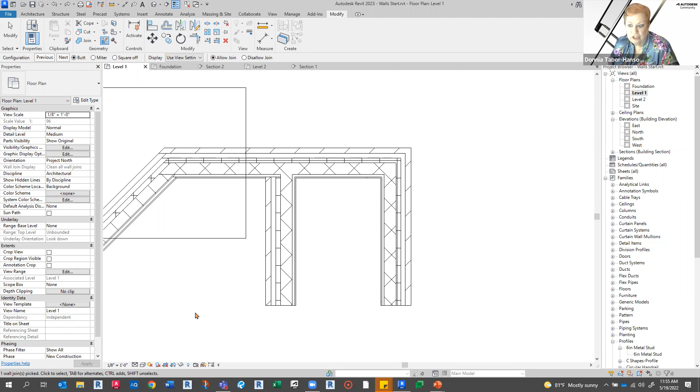All right, Donnia, are we getting close to a point we can make a break? Yes, I think I hit Q&A. Any questions, anybody? I think you were so thorough in going through every little option in the walls and some great tips and tricks in there that maybe you didn't have any questions, because normally there's a whole bunch of questions. Well, the stacked wall fell out, so I'll follow up with a blog post about the stacked wall. That would be awesome. And it's nice to see entities inside of Revit having little disagreements and you having to undo, because watching you troubleshoot is also a learning.

Oh man, when it comes to Revit CSI, I can fly with all of them. Yeah, Revit Forensics, that's my new title, yeah. Inspector Tabor-Hanson.

All right. Well, I really appreciate that everybody would take some time out of their day to come spend with me and hopefully pick up something. Tell me, did you get something new? I know that Kimberly got hers. Yeah, we so appreciate your efforts in these, Donnia, and your wisdom and all the goodness. So yeah, just drawing down, that was new to me when I started playing around with some things.